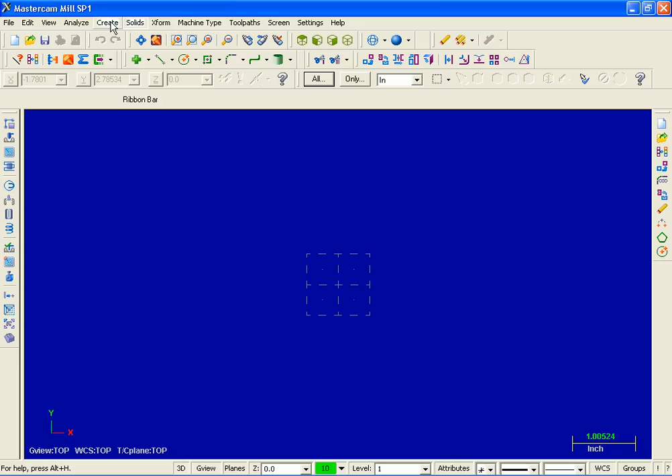For step 1 we're going to create 3 circles. I'm going to move up and pick Create, Arc, and then select Create Circle Center Point.

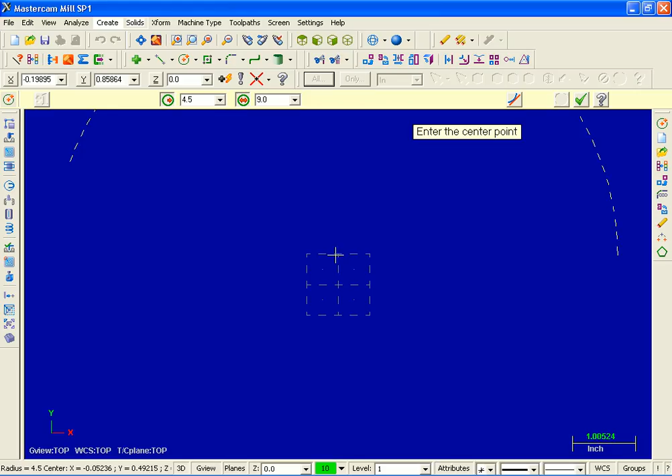For the first circle, the diameter is 9. I'm going to move up to the diameter section and input 9.0, and when prompted for the center point, I'm going to move down and pick the origin. I'm now going to select Apply, and also move up to the top and pick Fit.

On to the second circle. It has a diameter of 5 inches. So I'm going to input 5.0, and for the center point, same as before, the origin, the center of this circle. I'm going to hit Apply.

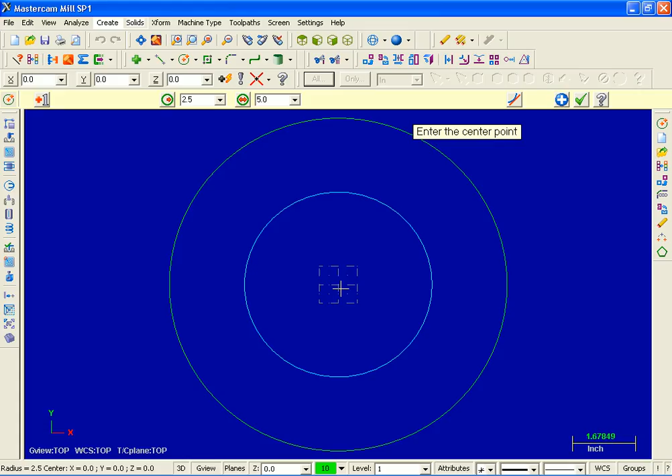For the third circle, the diameter is 3 and it shares the same center point, so I'm just going to move down and pick this center point. Everything looks great here. I'm going to move up and pick OK.

For step 2, we're going to create a 6-sided polygon. Let's move up, Create, Polygon. Now when prompted, select Position of Base Point.

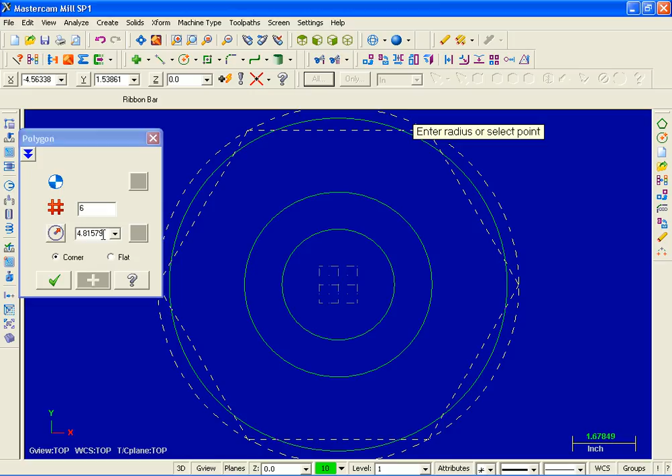I'm going to pick the origin. Now moving over to the left, number of sides is set to 6. For the radius, I'm going to input 3.0. You can see the radio button is turned on against corner, so everything looks great here.

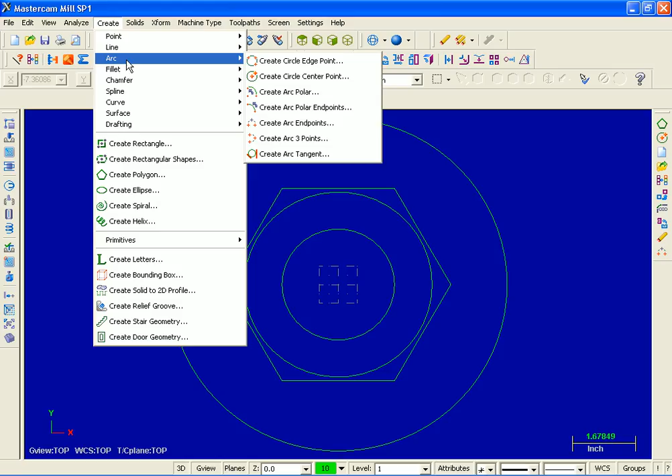Now moving on to step 3, we're going to create an arc with a radius of 1.5. Create, Arc, and this time we're going to select Create Arc Endpoints. The first thing I'm going to do is input the radius 1.5, enter.

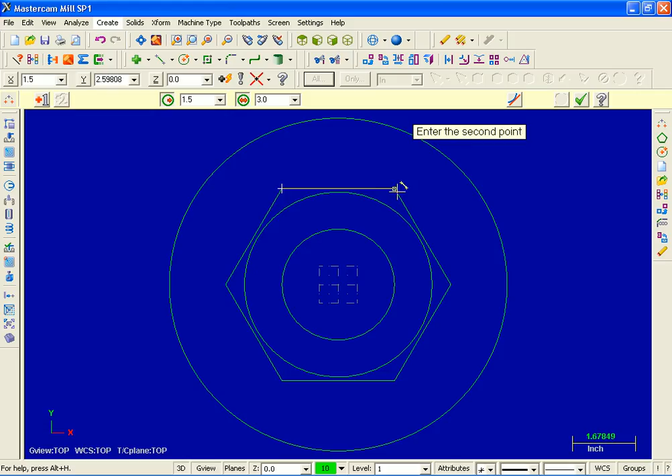When prompted for the first point, I'm going to move down and pick this point, and then move over to the right and pick this point. Now the next prompt, select an arc. I'm going to pick the top one. Everything looks great here. I'm going to pick OK.

For step 4, I'm going to delete the construction lines, that's the polygon we just created. I'm going to move up, select all, and then moving over to the left, check mark entities, then move down below and put a tick mark against lines, and go down to the bottom and pick OK.

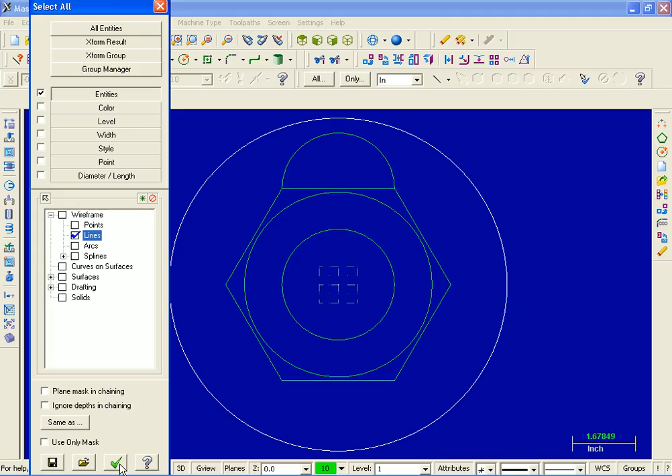As you can see, we've filtered out all the lines in our geometry. Everything looks great. I'm just going to move up now and select the icon for Delete Entities.

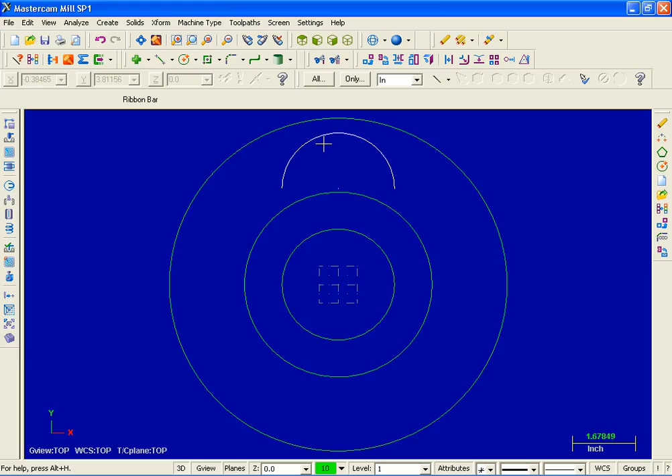For step 5, we're going to rotate this 1.5 arc. Xform, Rotate. Select entities to rotate - I'm going to pick the arc, and then move over to the right and select End Selection.

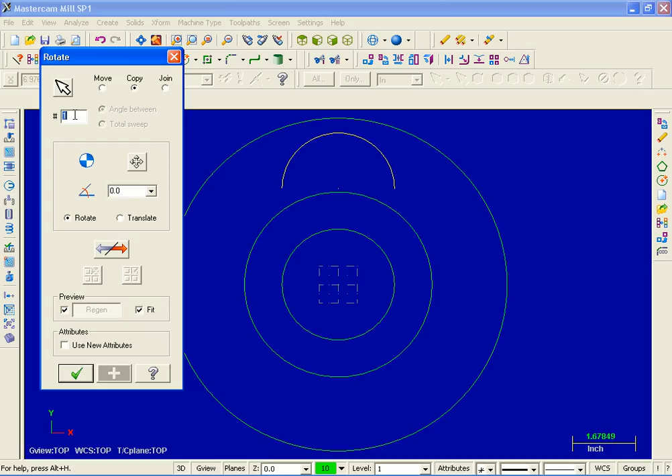Now moving into the Rotate dialog box, Copy is turned on, so I'm going to keep my original geometry. For the number, I'm going to input 5. Angle between, I'm going to leave that turned on.

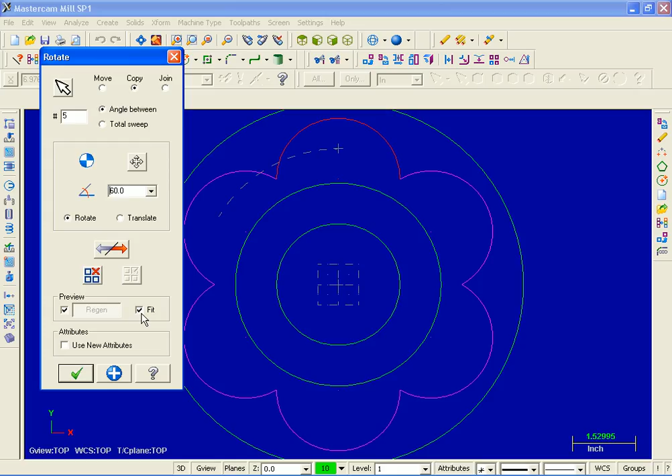Moving down, for the angle I'm going to input 60 degrees. We've got it set at rotate, previews on, fits on, everything looks great. I'm going to pick OK. I'm next going to move up and select clear colors, so everything looks good.

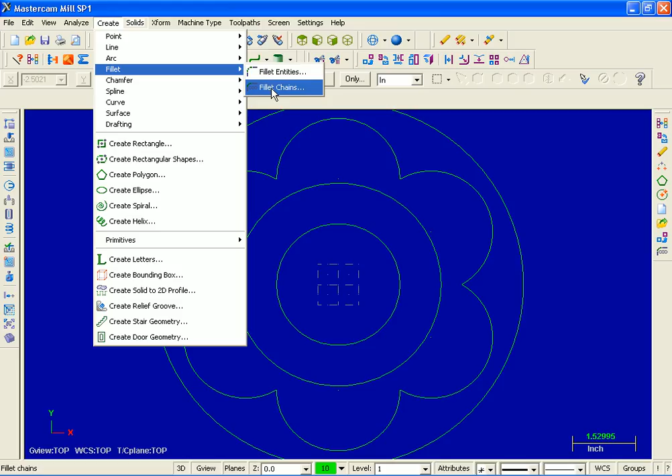For step 6, we're going to fillet the corners - create, fillet, and we're going to pick fillet chains. The fillet radius is set to 0.25. That's exactly what I need.

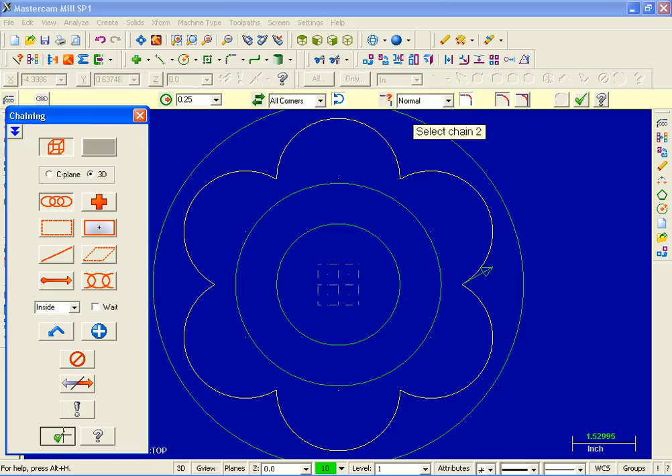When prompted, select chain 1. I'm going to move down and pick this arc, and as you can see, everything's been chained successfully. Moving over to the chaining dialog box, I'm going to pick OK, and then move up here and pick OK. So everything looks great there.

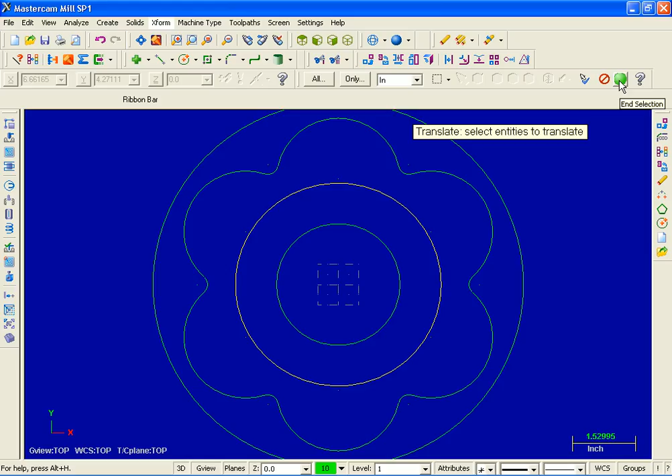For step 7, what we're going to do is translate the 5-inch diameter arc down. I'm going to move into Xform, translate. When prompted, select entities to translate - I'm going to pick the 5-inch circle. I'm going to move up to the right and select end selection.

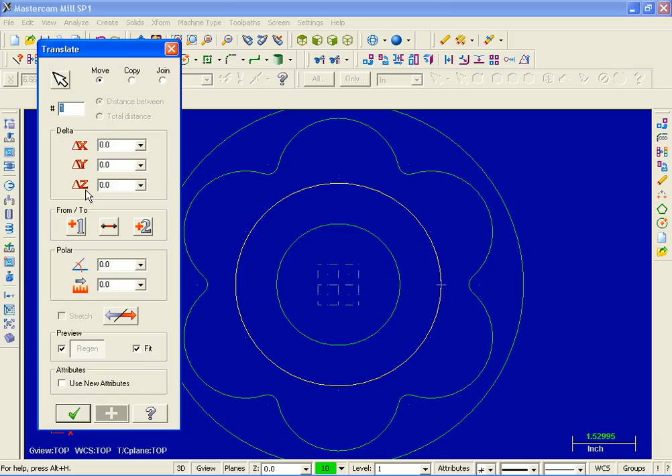Moving over to the left, I have move turned on, so I'm going to delete my original geometry - I'm going to do a move, not a duplicate. Number of steps is 1, so that's good. Then moving down into delta XYZ, I'm going to put in minus 0.125 for Z. Everything looks good. Let's pick OK.

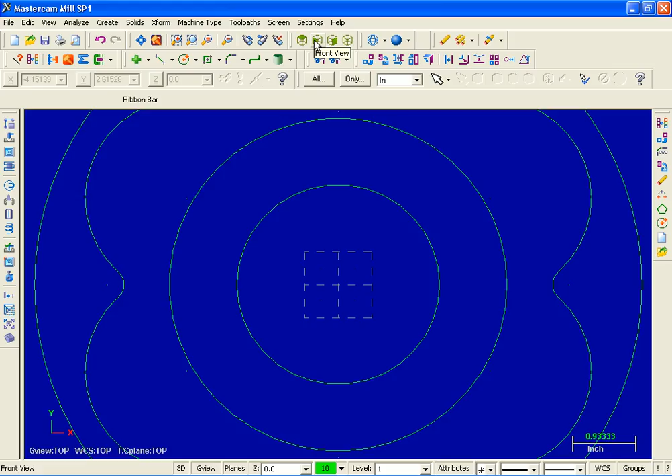I'm going to move up and select clear colors. But let's now have a look at the front view. This line at the bottom represents the 5-inch diameter circle, and that's a circle that we just translated down 0.125. Let's move up, get a top view, and do a screen fit.

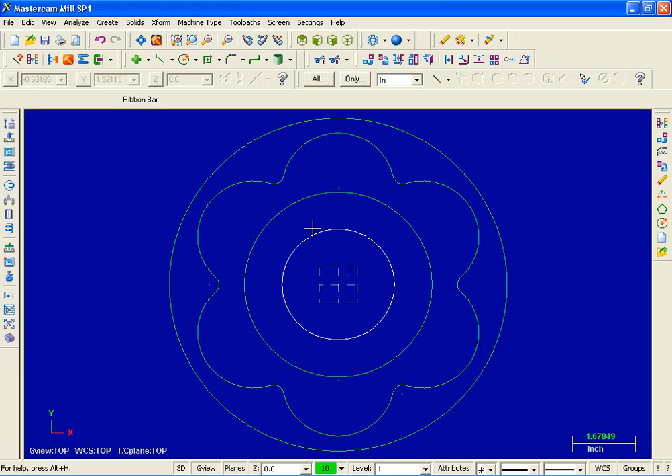Moving on to step 8, let's save the geometry. File, save as, and now you can input the name of your file. This completes the geometry for Tutorial 5. Thanks for watching the video.